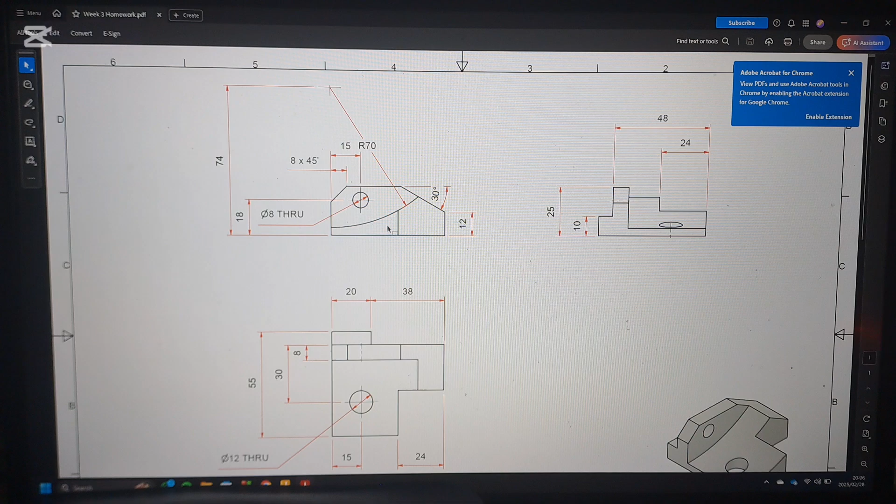They give us enough information to build what we need to build, and they also give us this projection of it, a 3D image of it, so we're able to see and compare to what it should look like. You obviously also have to refer to the other two drawings to see exactly what your dimensions need to be, for example, the width when you extrude this image, or the height we get from here. So let's start.

Okay, so the first thing I would do is I would draw a rectangle, and I would dimension it to the height that we have and to the width which we get from here. So if we do that, that is 20 and 38, so that's 58, and a height of 25.

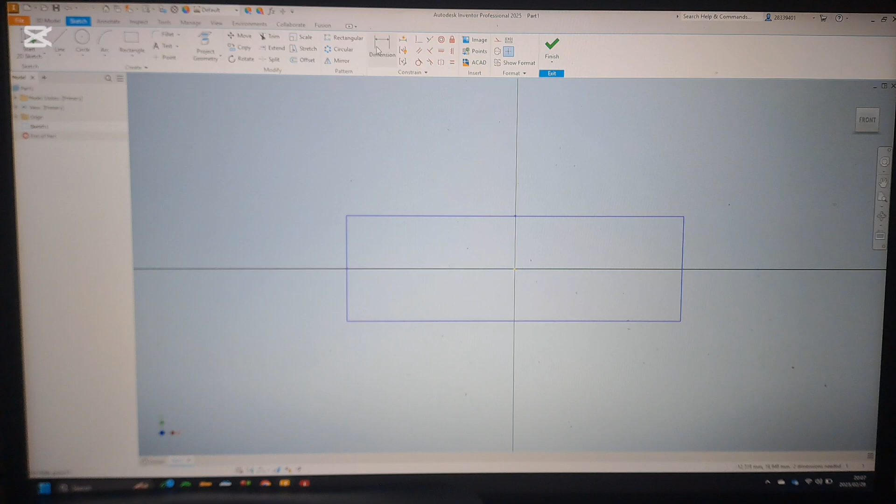Also, when you begin, I would constrain this just so that we have something that is centered around the origin, and that it doesn't cause any problems later on when we have to dimension. So this is 58 and this is 25. Okay, so there we have our entire block cut out.

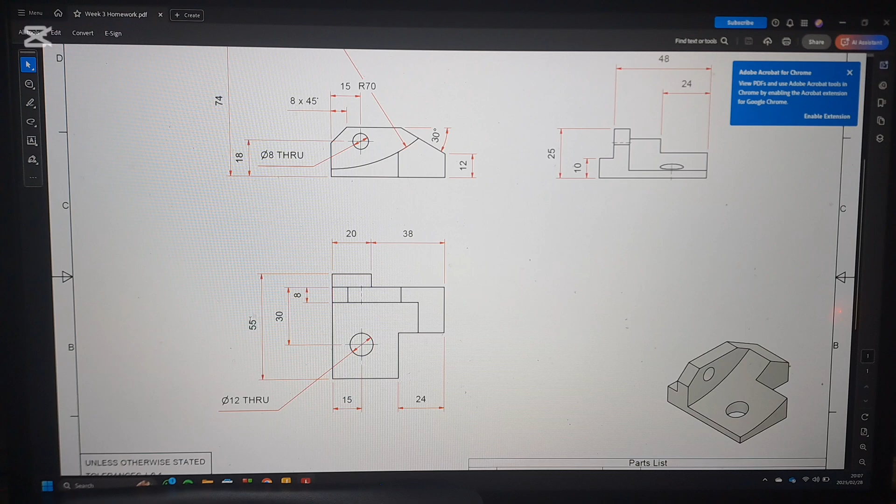We can extrude this immediately. We know that it is a distance of 55 millimeters from here, so we can extrude that symmetrically 55 millimeters, and we get a massive block like that. So at least now we have a starting point of what we would like to work with.

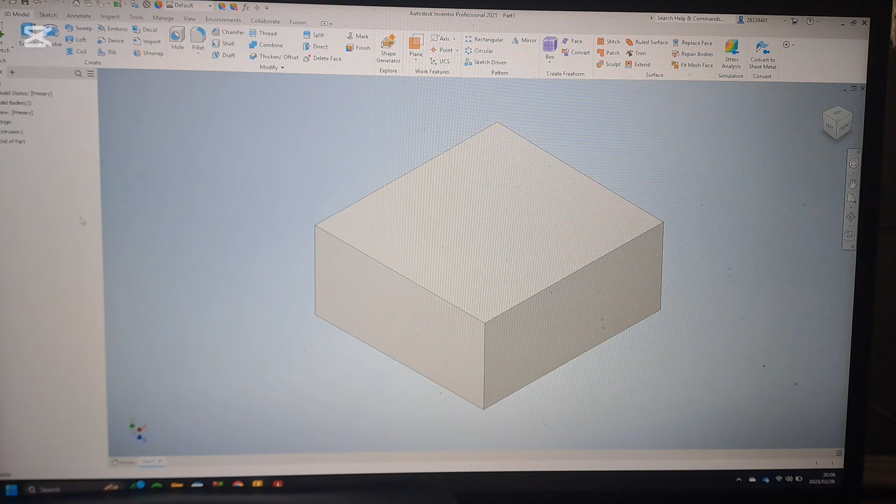Okay, so if we go back to the drawing, we can see that we have a chamfer which is 8 millimeters by 45 degrees, and we have an angle of 30 degrees over here, which leaves this height of 12 millimeters. So I would suggest to start with those two, just so that you get any angles away. We prefer working on a flat face. You can do it later on, that's not a problem, I just prefer to get it done immediately. These are the hardest things to do, basically.

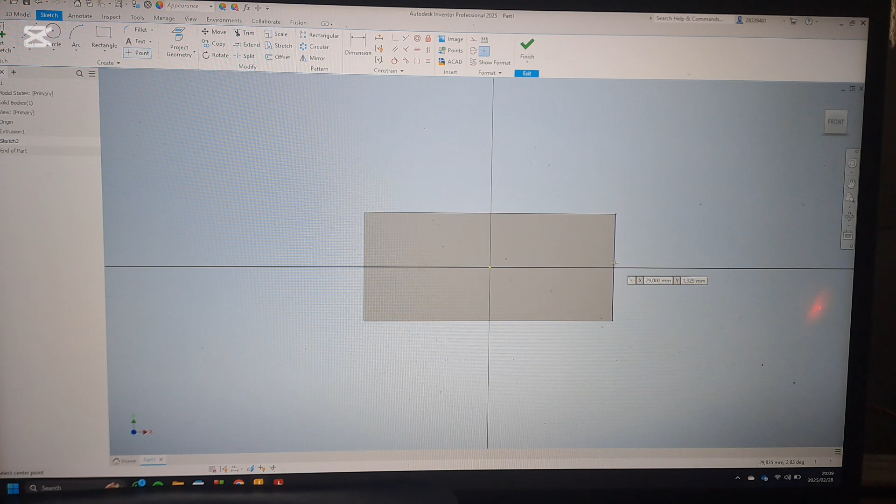So if we go to the front view and we start a new sketch over here, we take a point, because we can't just dimension a line anywhere. This point, I'm going to constrain it to the vertical here. So now that it's constrained, I'm going to dimension it as a height of 12 from the edge of this line.

So now that we have this height, we know that the line is going to run somewhere from here. We don't know exactly where, but it must pass that point. So we can start at that point, and we can just create a line further than that. And if we dimension this line to this, we can dimension it as 30. So there you have that angle created.

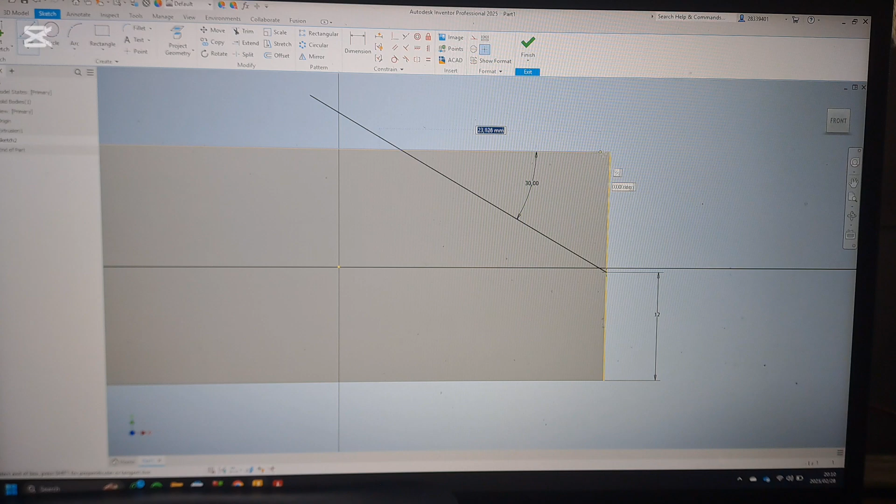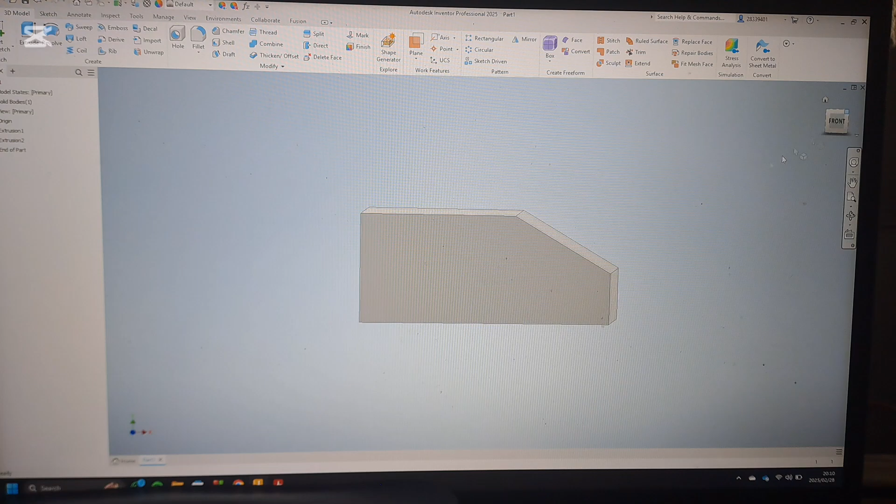So the way to extrude this would be to create another line to the edge and back down. Okay, so now you have a triangle here basically. So we can extrude this, and we just press cut through all, and when you do that, there you have that edge created. So if you look at it, it goes right through the entire thing.

So now we can do this angle. The way we do this is we don't have to do another drawing. We can just do a chamfer, which is, they said, 8 millimeters.

And if we do that, then we have our chamfer of 8 millimeters. If we go back to the drawing, the next thing we need to do is we can create this hole over here. So we just need to take another point, dimension it as 18 millimeters above and 15 millimeters away.

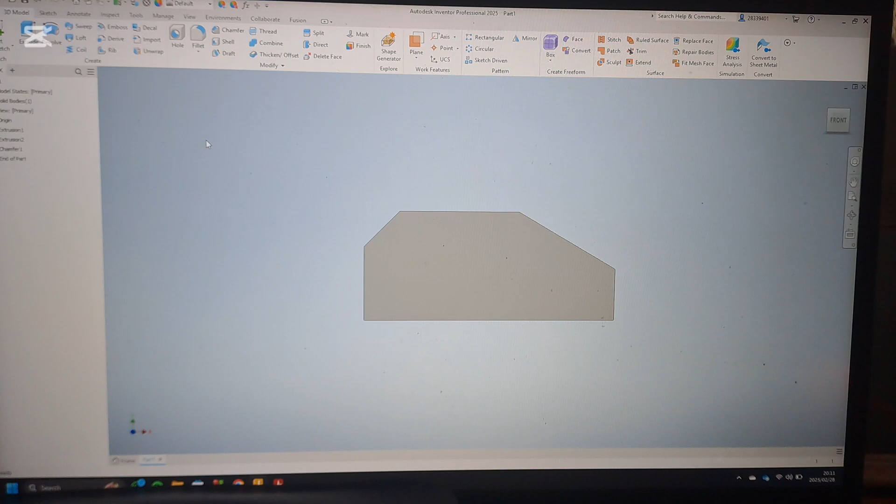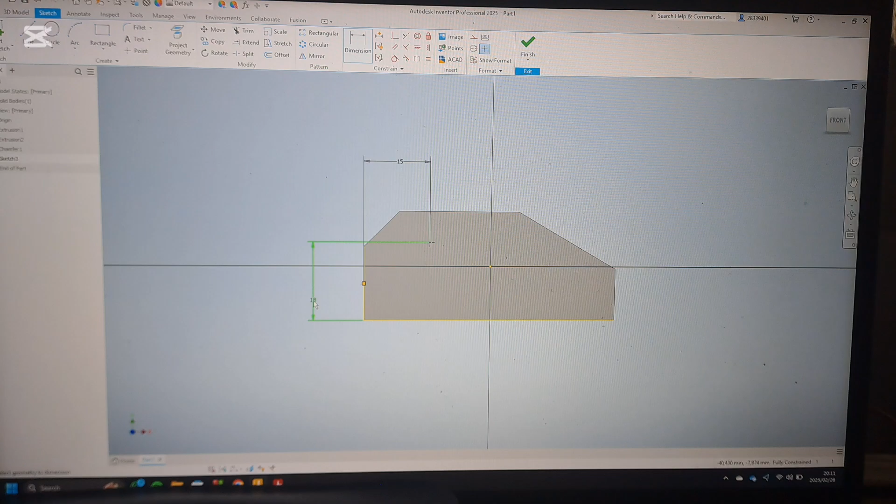So we create another sketch on here. We take a point, place it anywhere there, and we can dimension this. This was 15, and from here to here was 18. Perfect. Now that we have the hole, all we have to do is cut the hole, which is 8 millimeters through.

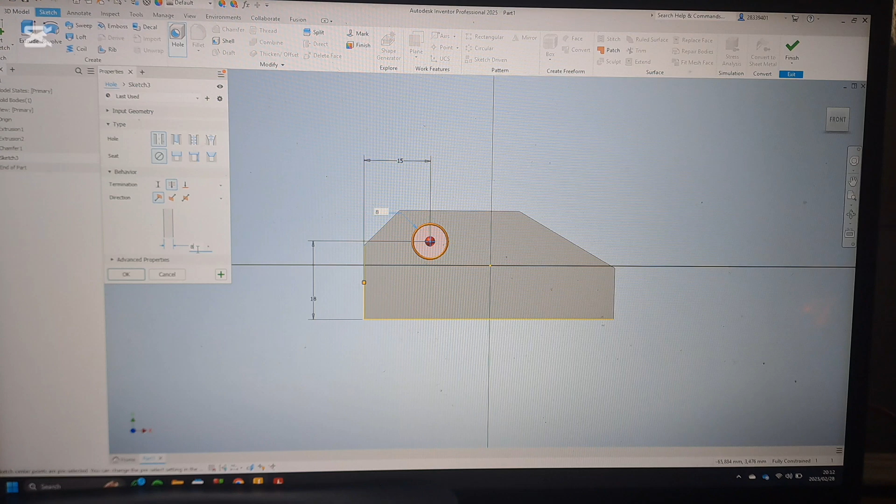So if we do this, we don't have to use the circle feature, we just take the hole feature, and we have 8 millimeters through. I don't think it's isometric, I think it's just that. 8 millimeters, there we go. And there our hole is created. So it goes right through the entire block.

We will take out, if we look here, we will take out all of this eventually. We first want to deal with all these, whatever is basically in your vertical plane. You want to deal with that first. We will get to all of this stuff eventually.

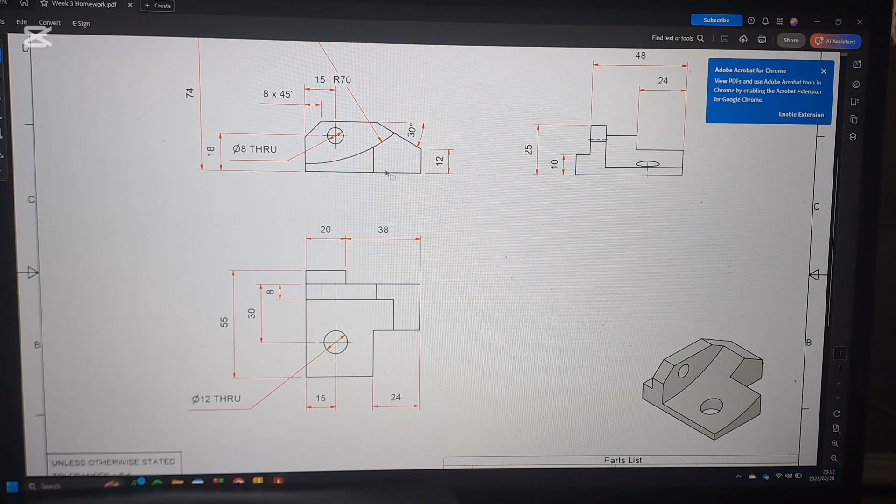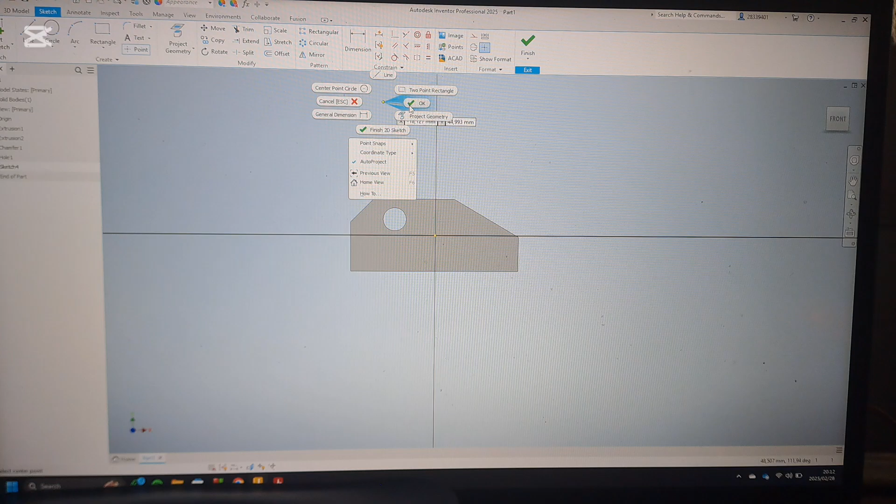Now the next thing we have is this circle, or this arc that is from a radius of 70. So the way we do that is, if we go back here and we create another sketch, we just take another point and place it anywhere, and we will put it in line. We can just put it in line with this.

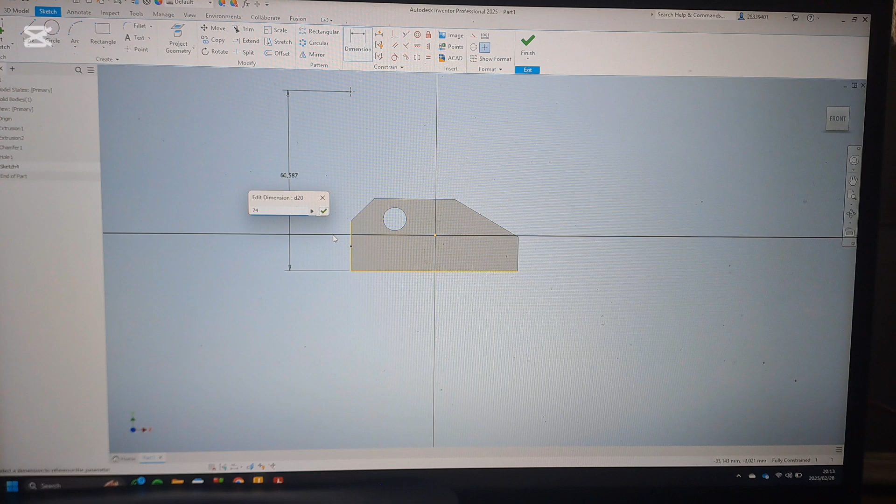Okay, now that we have it vertically aligned, we can dimension this to the bottom as, if I'm not mistaken, it was 74. Let me just double check that. Yeah, 74. Now that we have that, we can create a circle from this point. And we can dimension it as diameter 140 because it's radius 70.

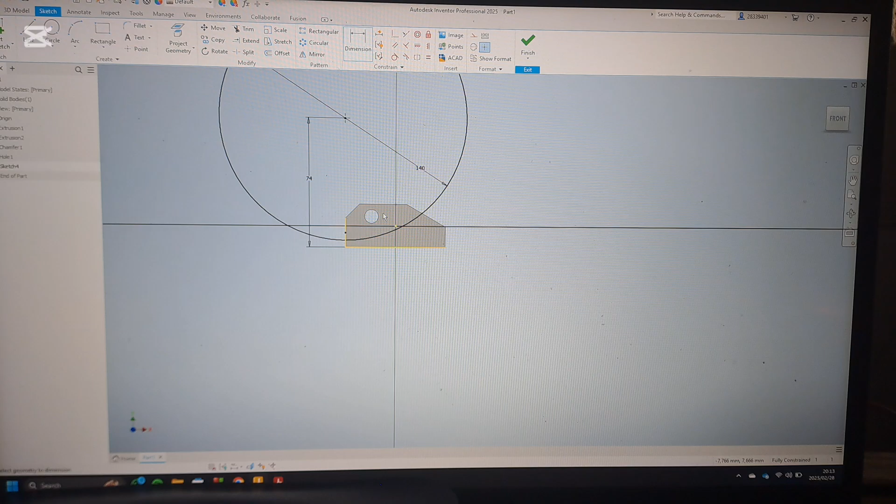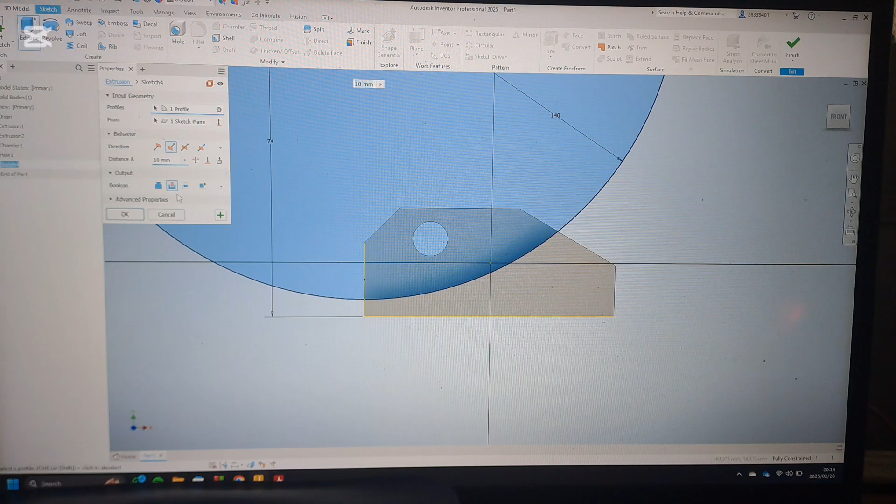We also know that this is 8 millimeters, so 7 plus 8 is 15, and if we subtract that from the total of 55, we get that this from this edge to this edge is 40 millimeters. So this distance is 40 millimeters. So if we cut a distance of 40 millimeters, then we should have something looking like that, and that's what we want.

Okay, now we need to create this little block over here. We know that it's a distance of 24 from the side, and if we look here, it's also a distance of 24. So this is a square. So the way we do that is we would go to the bottom view, because you can't exactly create or cut or make a sketch from a curved surface.

I think there is a way, but we haven't done it yet, and I'm not exactly sure how to do it. So I would look for the simplest route. This is what CAD is about. It's looking for the simplest thing to get where you want to be. So the easiest way to get this would be to actually go to the bottom view.

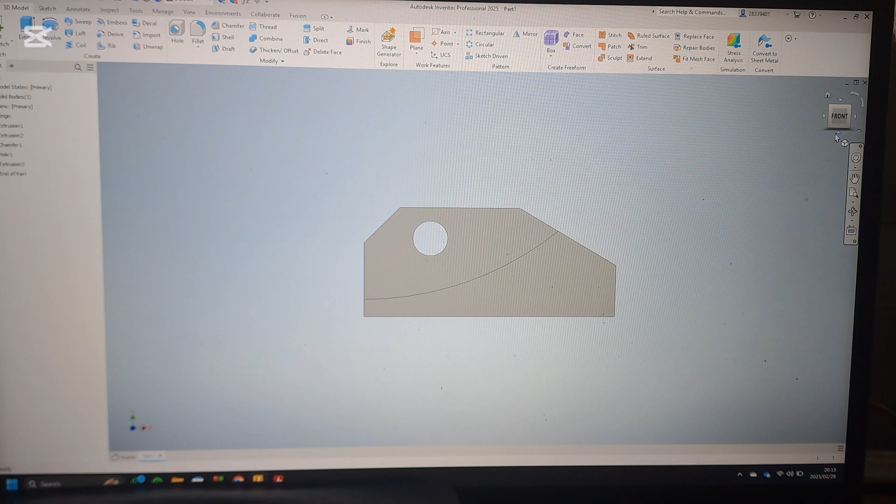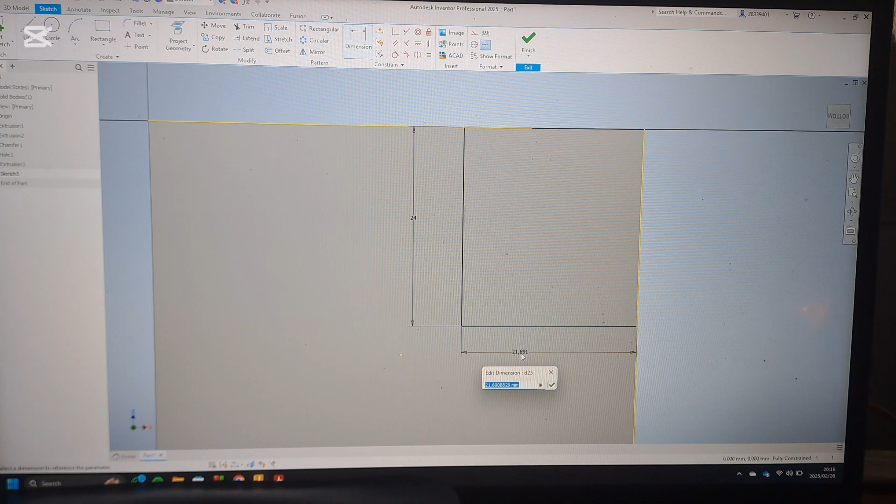So if we rotate this to the bottom, we know that this is the area we want to work with. So let's create a sketch here, and we just create a square, and we just make sure it's in line there. That's correct. So if we dimension this, this is 24, and that is also 24. So now we have that area over there.

If we extrude this, we can cut and through all, and now when we look at the top, we have exactly that shape that we're looking for.

That's the shape over there. So now we're basically done with the front view. What we can do is we can move to the side view. There's not a lot left for us to do other than this is done. We have just this hole over here, which we can do again from the bottom view. If we rotate the object like this, so actually let's go ahead and do that.

This is diameter 12. So if we go to the front view and we rotate to the bottom view, then we know there's a circle or a hole here of diameter 12. Let me just get the dimensions. It is 50 millimeters away from here, and it is 30 millimeters from this edge over here.

So before we actually do that, there's a bit of a problem. We need to get this edge over here. So we need to separate all of this so that this is standing alone, and we know it's a height of 10 millimeters, and we know this is a distance of 7 millimeters. Again, we know that this entire distance is 48, and this entire distance is 55. So 55 minus 48 gives us a distance of 7 millimeters from there.

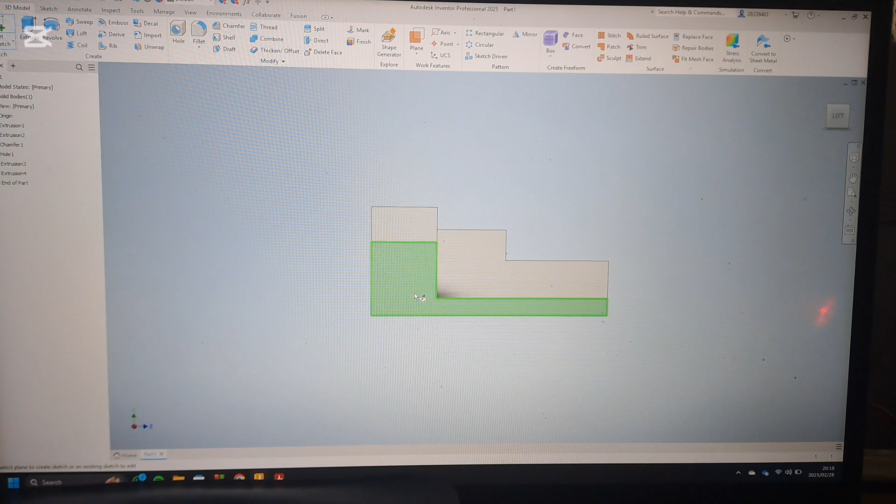So if we go back here, and let's just rotate to this view, so we can create a sketch over here. Okay, so let's create a sketch over there. Remember, here we're taking away our material, so it would be best to just create a rectangle so that we can take all of this away.

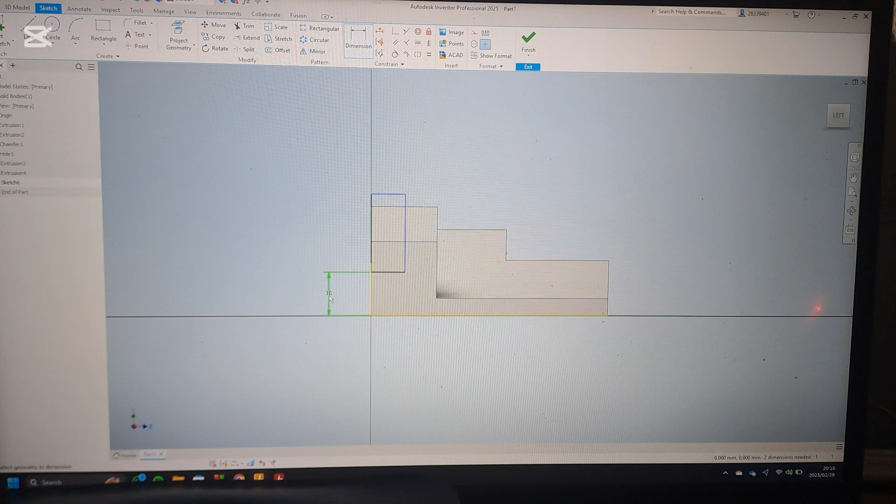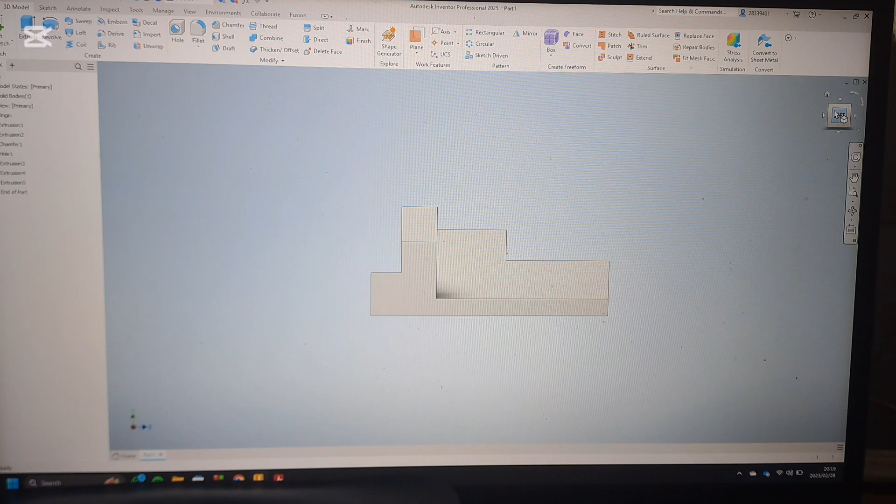We know that the height above here, so this distance to that distance, is 10, and we know that it is a width of 7. So if we take this distance to that distance, it should be 7. We just want to make sure that also this is aligned with that. Okay, so now we can extrude, and we can cut through all, and if we look at a bit of a top view or top left view, we can see that that is all gone.

Now we just want to get rid of that little bit that is there. So if we go to the top view, then we know we want to get rid of a little bit of material that is there. So if we look at the top view, we know that it's a distance of 20. So we'll create a rectangle of a distance of 20, because that's what we want to take away. So if we create a new sketch on this face, we can just do that.

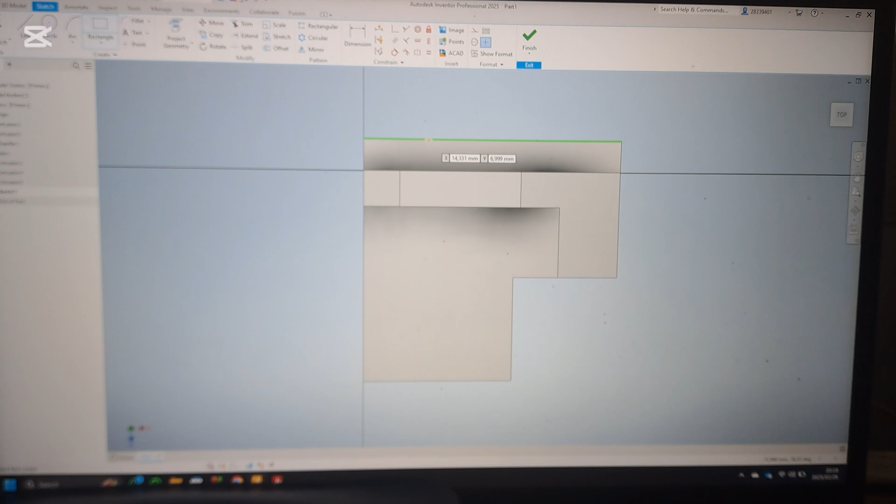Oopsie. Okay, let's just go back for a minute. We create a sketch there, and there we go. It doesn't really matter if your rectangle is away from your sketch, because you're not adding anything, you're taking away. So if there's no material here, then it will just take away nothing basically, so you don't have to worry about that.

What you do need to know is that you must make sure that this rectangle, I keep calling it a triangle, is in line with your origin and the surface over here. So all you have to do is horizontally constrain it to the edge and this point to the origin, like that. So now you know that that's fine. We also need to dimension from this edge to that edge as 20.

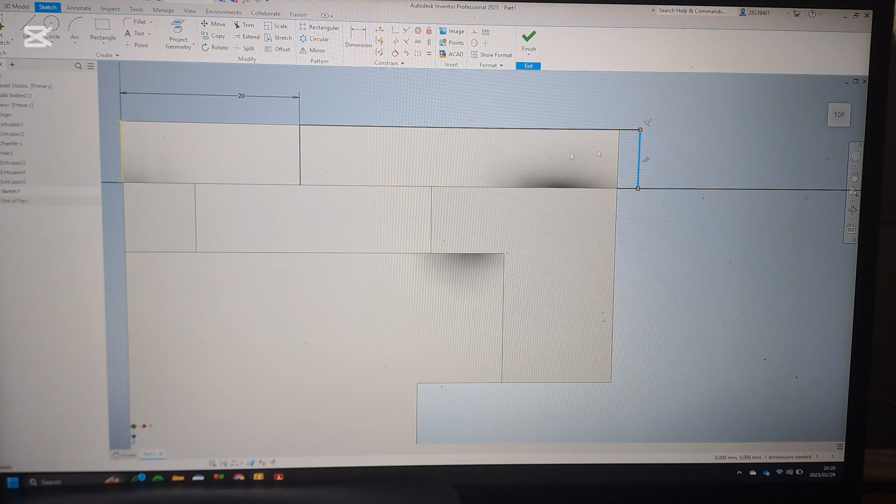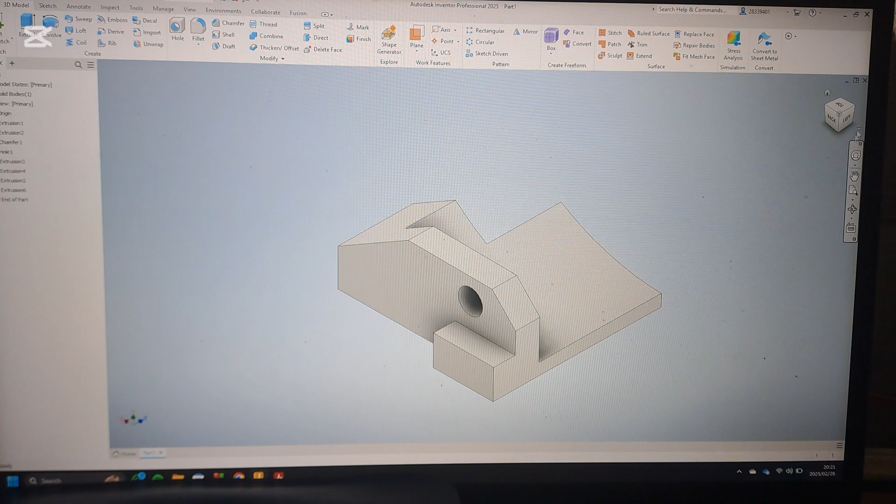And so now we have this area here that we want to save. If we just elongate that, that's fine. Then we can take away this area over here. So how we do that is, again, cut through all. Okay, and if we do that, there we go. So now we have that piece over there. Now that we have this piece, we have this edge over here, so we're able to create that hole that we want over there. So let's go to the bottom view and let's rotate it out like that.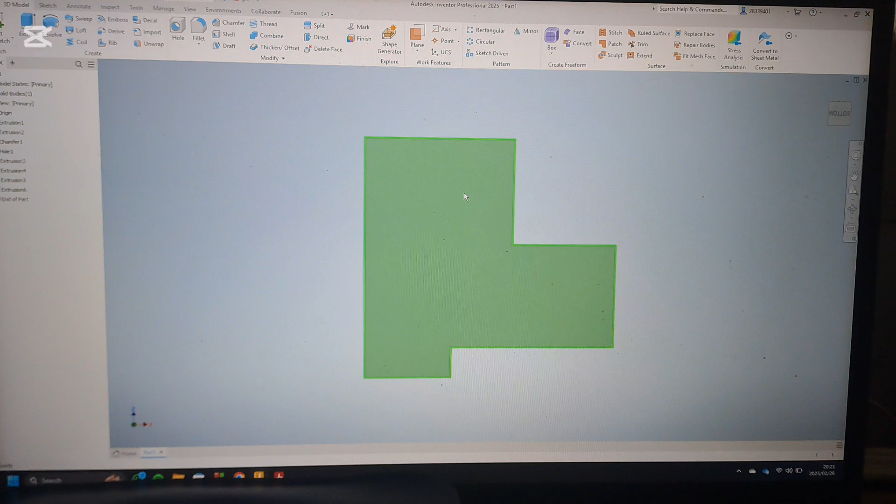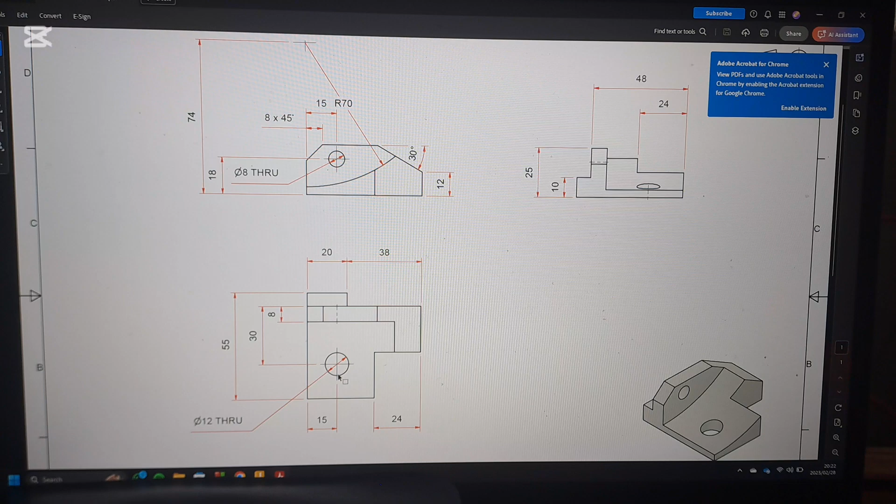Now we go back here, we can see that the hole is 15 millimeters away from this side, and it is 30 millimeters away from this edge over here. So let's go back here. So if we go back here, we can create a sketch, place a point over here, and we can dimension. So we know that from this point to this side it's 30, and we know from here to this edge is 15. So there we have the center of the circle, or this hole rather, that we needed to create.

So now we can just create a hole, and that was 12 millimeters. And so there we have it. That is our entire support created, and that is how you would create your support.

There was one about how to get decimal points, so I will show you. I will do that before I do all of this. Let me just show you guys, because I'm not going to actually dimension this. I've already done it, so let me just show you guys what it should look like. If we dimension, let's say we dimension something like this, the chamfer, all you have to do is double click on it and this should pop up.

If you don't want this dimension that's over here, you just click on hide value and you can type in whatever you want. So for example, if that's what you want, then you can do that. After that, if you want to take it away, obviously you just do that and you can unhide the dimension.

In terms of the decimal points, all you have to do is double click and come to precision and tolerance. Your primary unit you would take to however many decimal points you want. So if you want 1, then you just click 1.1. If you want 2, 2.12, and so on. That's about it that we would actually need now. I don't think there's any more to the dimensioning that we need to know for now.

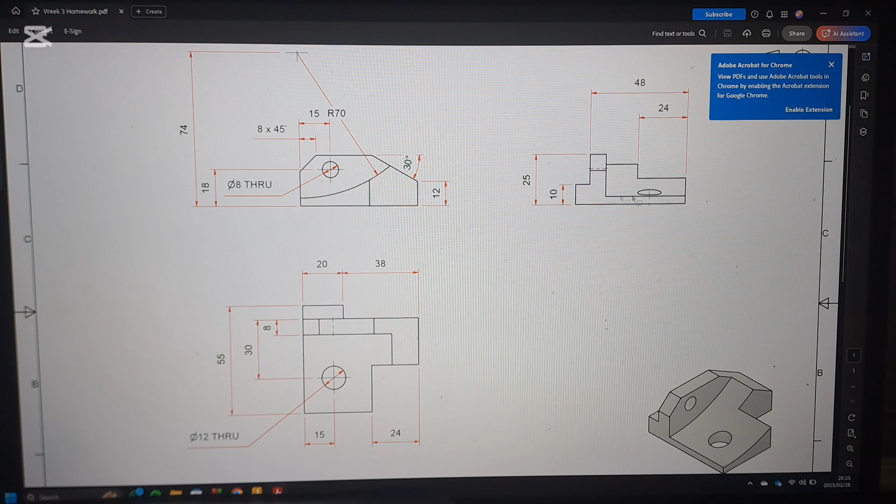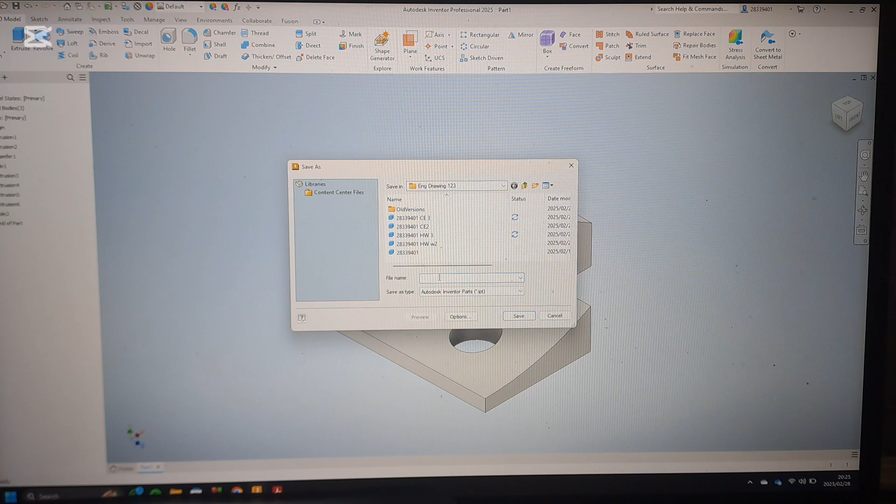Okay, so now that we have our support created, we can go ahead and do our drawing. I was never a fan of drawing, but nonetheless, if we save this, so obviously everyone that is watching this, I hope you are from group 4. You will be saving it as your student number, and it would be your homework, HW3 IPT. So I already have it saved, so I'm not gonna save this one.

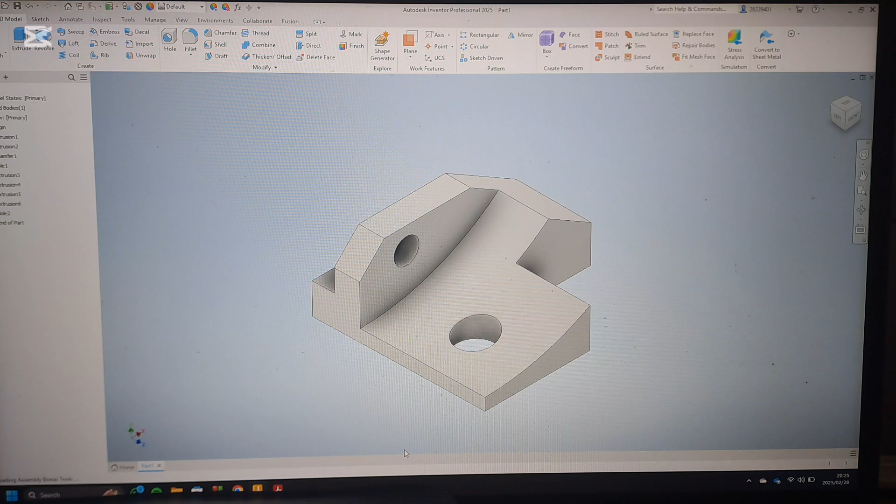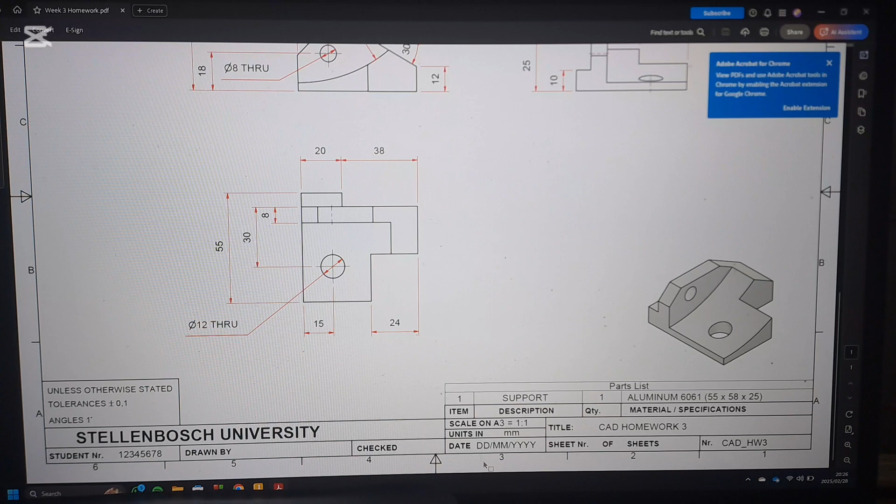However, let's open up a new template. It is on an A3 template. We get that information from here. We know it's on an A3 template, just in case you guys are wondering that. So if we place a base view, okay, now it's gonna say I must save it. Anyway, I'll just use that one. Okay, there we go. They tell us on this information that it's an A3 and a 1:1 ratio. So if we go back here, it's 1:1, and we have it created.

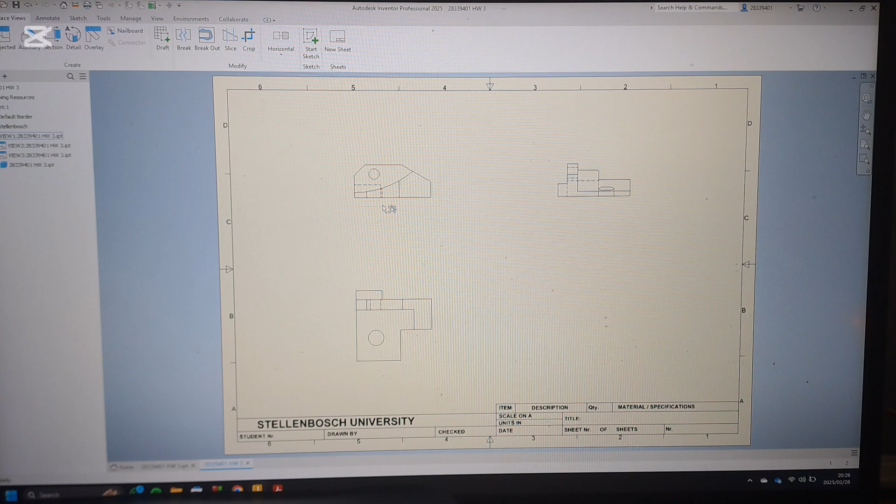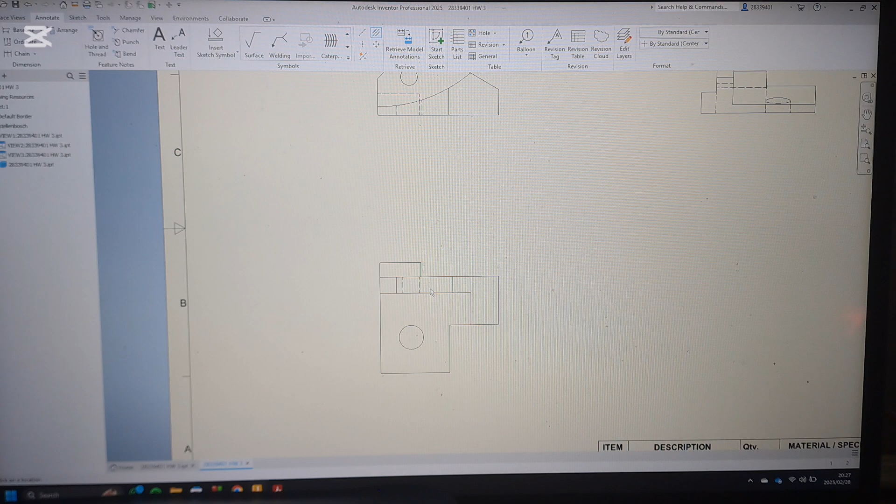Obviously, we want to move it out from here, so we want it there. We want the side view, and we want the top view as well. So that should be done. Okay, so if you zoom in, you see that there are a few hidden details. We will get rid of that in a minute, but before we do that, we need to do our center lines. So if we go here and we dimension, we click on this tool over here, then we can dimension center lines for any hidden holes, for example, this over here.

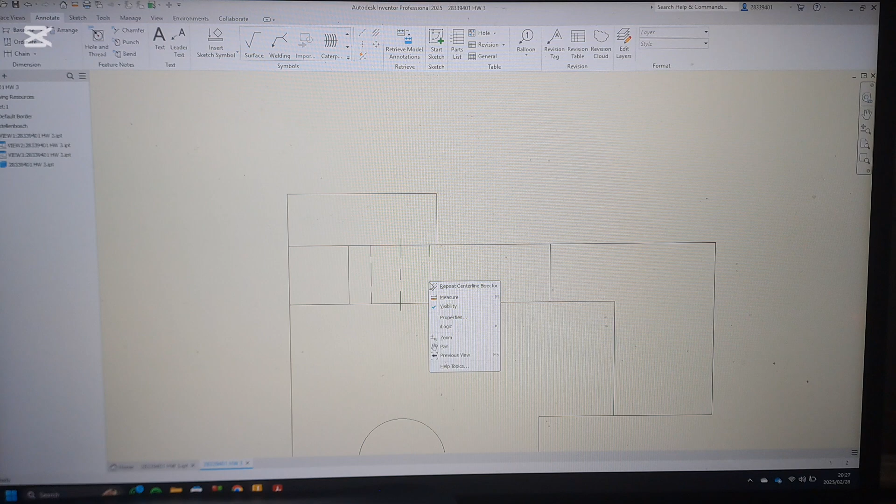So the way you do that is click on there, and you click on there, and this center line would appear. But if we look in the drawing, the center line is there, but the hidden detail of that hole is not. So all we have to do is hide this hidden detail. The way you do that is you right click on it, and you just click on visibility, and it disappears.

So make sure, before you click on visibility, that you create this center line, because if you don't, it's very difficult. You'd have to go all the way back like this, and then you'd have to create the center line using those two hidden details, and then you'd have to come back all the way to your drawing.

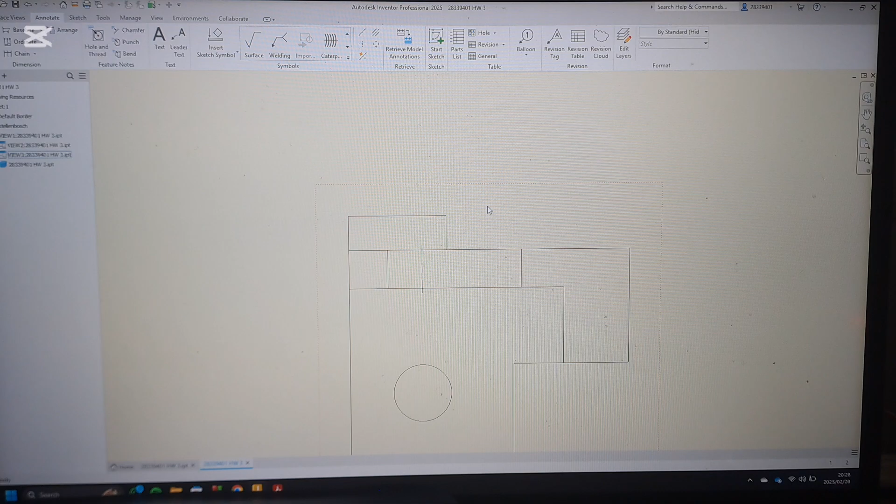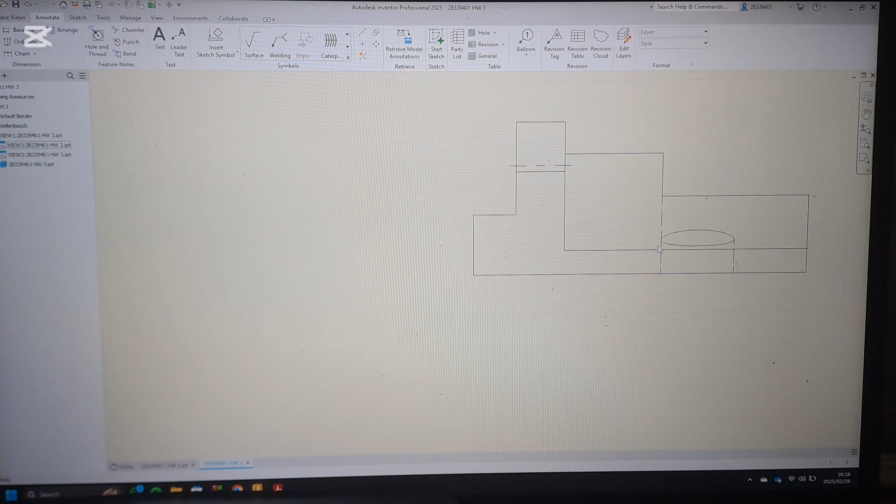Okay, so we have a couple more. There's one here. So it's this one and that one, and now we can just make all of this invisible. We also know that these hidden details over here we don't need, so any hidden details that you do not require, you can just click on the visibility and take it away.

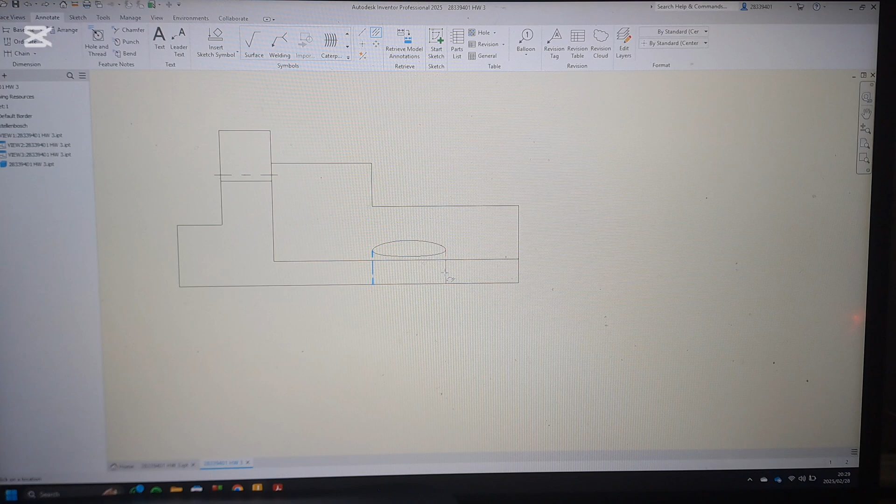If we look at the drawing, we have a center line over here, we have a center line over there, and we have a center line over there. So I think I did make a mistake here. Let me just see. If we take a center line to that, yeah, I have to go back and create the center line for this. There we go. Now we have the center lines for our circles.

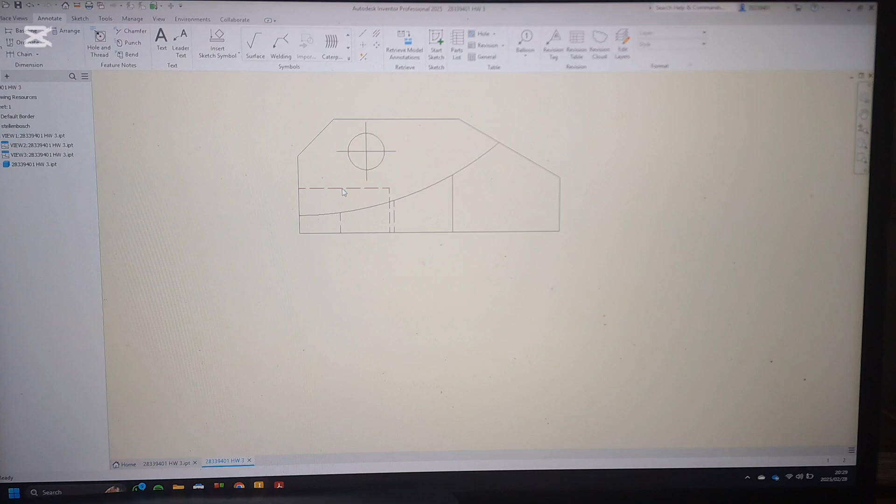So there's not much. Oh, there's this hidden detail that we don't want. So it looks basically plain. I think in future lessons we will have to use hidden detail and stuff like that, but for now obviously we don't.

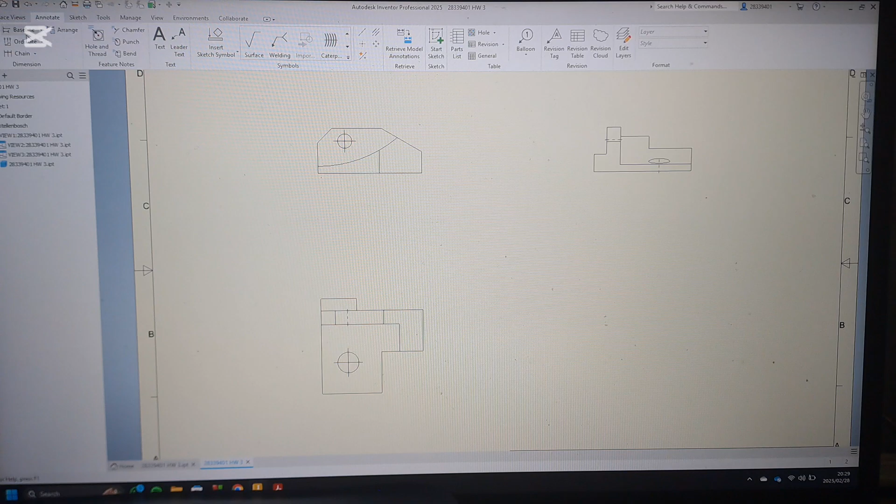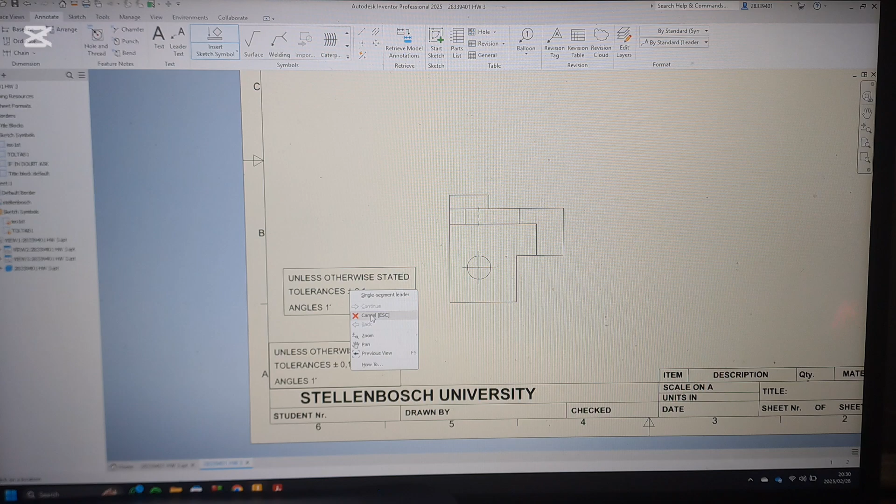I would suggest also, before you begin any dimensioning, because sometimes with dimensioning you might make a mistake and then it becomes a whole schlep, I would say just add all of your parts that you need to add before you actually start dimensioning anything. It's fine if it's not in order. Also, I would suggest that all your information that you need to add, you should add now before any dimensioning begins, just so that it becomes easier once it's actually there.

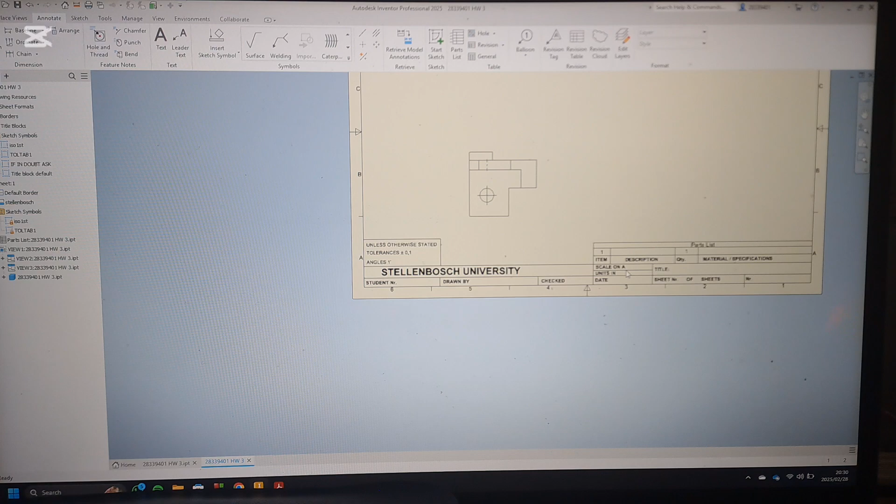Okay, so I'm gonna go ahead and add all my details in. I'm sure you guys know how to do that. If you don't, all you have to do is click on text, just click where you need to add, and then you can add any information that you want to add and click OK, and it should pop up right there.

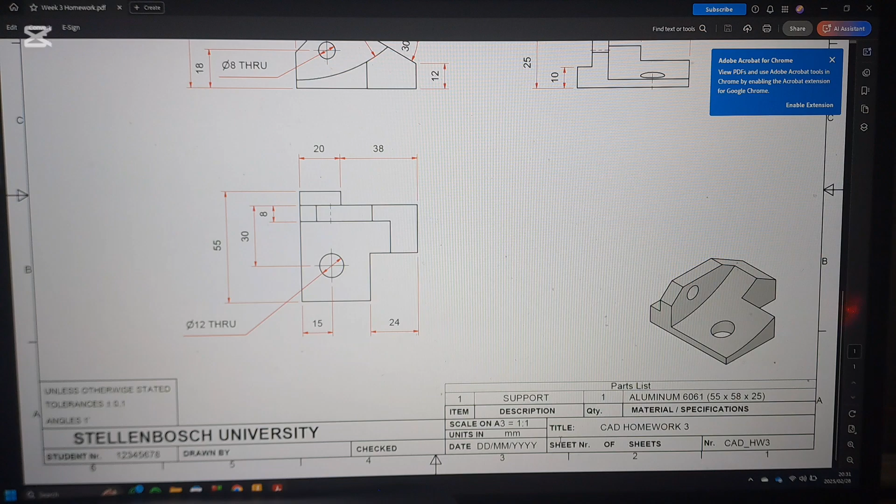So I will add all my details. Obviously you guys add your details. Make sure that it corresponds to what is given to us over here. Obviously you put your own date and month and year, and yeah, so just make sure that all that is done. And then once this is done, then you can go ahead and dimension your drawing. I'm sure everyone who is here in class knows how to dimension everything.

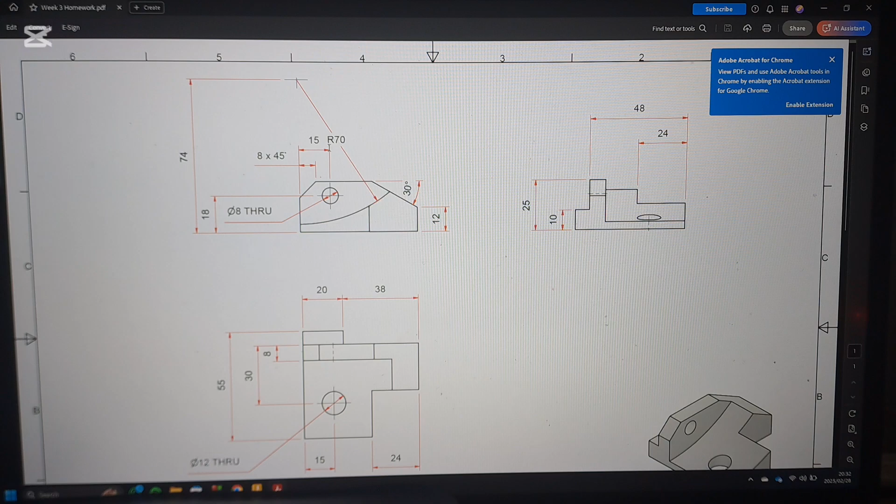For some people there is a bit of confusion between how to get all these dimensions and things like that. For example, there was one about how to get decimal points. So I will show you before I do all of this. Let me just show you guys, because I'm not going to actually dimension this. I've already done it. So let me just show you guys what it should look like.

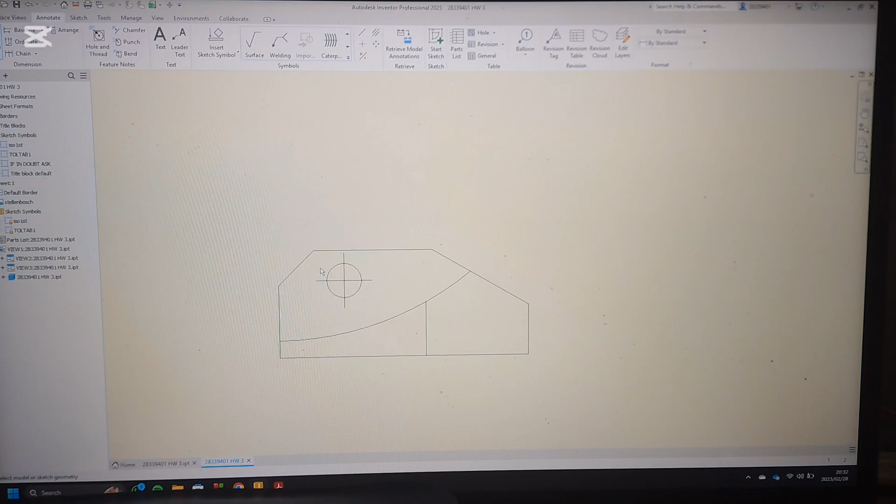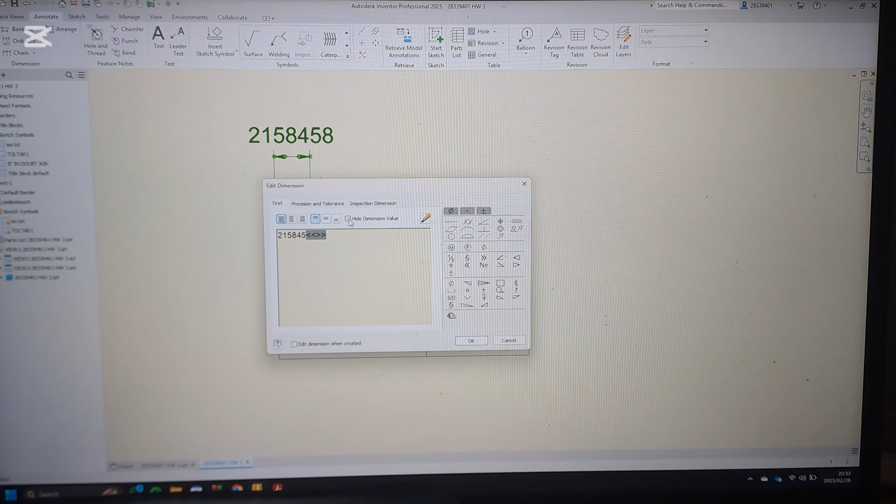Let's say we dimension something like this, the chamfer. All you have to do is double click on it and this should pop up. If you don't want this dimension that's over here, you just click on hide value and you can type in whatever you want. So for example, if that's what you want, then you can do that. After that, if you want to take it away, you just do that and you can unhide the dimension.

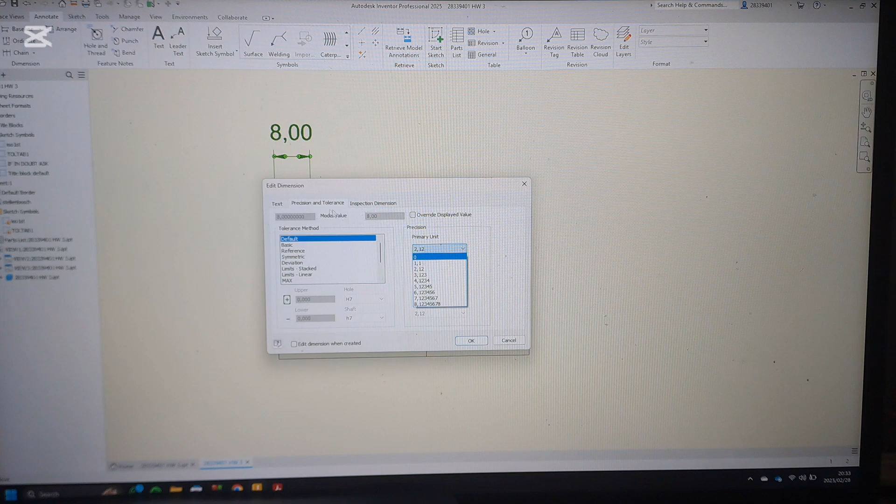In terms of the decimal points, all you have to do is double click and come to precision and tolerance. Your primary unit you would take to however many decimal points you want. So if you want 1, then you just click 1.1. If you want 2, 2.12, and so on. That's about it that we would actually need now. I don't think there's any more to the dimensioning that we need to know for now.